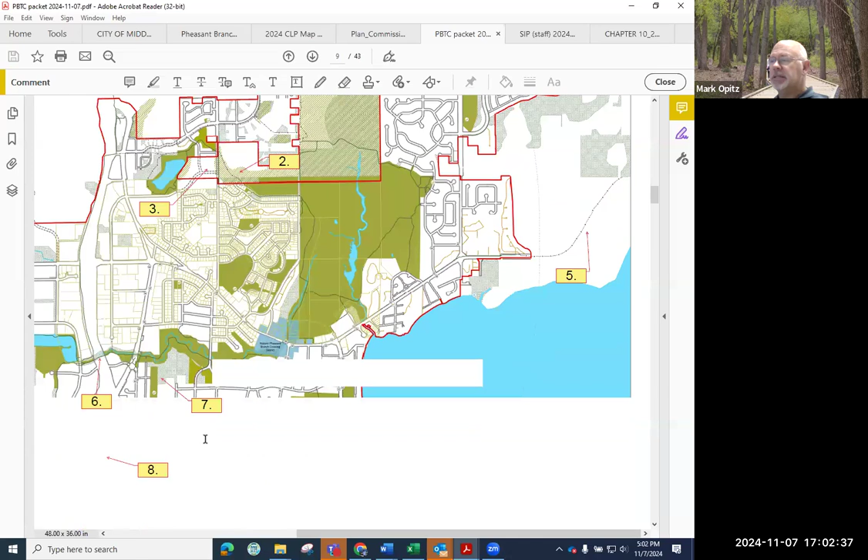So basically, we just wanted to see if you had any feedback. We're showing our trail systems here as part of the official map. So that's showing the continuity between the trail on the north side of Whittlesey Road and the established trail in the Misty Valley subdivision.

I seem to be having mapping display issues. I hope that doesn't go the whole meeting because that would be very unfortunate. There we go.

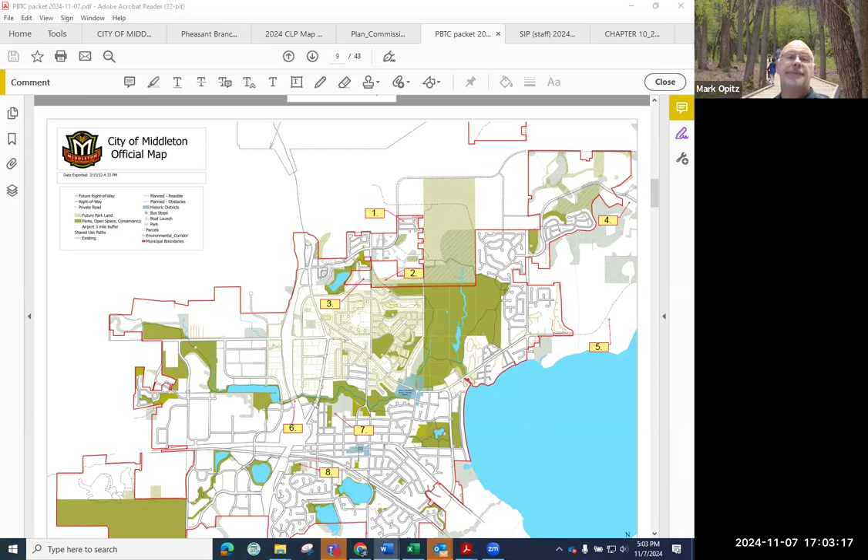Anybody have any questions? I have a question about number 2, where it's pointing. How come there are 2 parcels that actually just got annexed into Middleton last night - one is showing up as solid green, the other one's showing up as a combination of environmental corridor and future parkland? So why is one already future parkland and the other, when they should be the same?

Yeah, I would agree they should be the same. That sounds to me like it's a mapping error. I'll talk to Daphne about that.

Thanks for catching that. Okay, and then also I wonder, so there is going to be a hearing, so we'll have time to make other changes, yes? Yeah, it would be good to make them - if you have changes, it'd be good to go to the public hearing with the final map.

Is there a... well, I'm thinking about the proposed plan now for the Ziegler development on the west side of High Road, having some sort of narrow but existing buffer that they would maintain. Oh, I see, I see. Yeah, we could...

Yeah, I'm having problems zooming in, I guess. We could show that as well. Okay, I think that would be good to do.

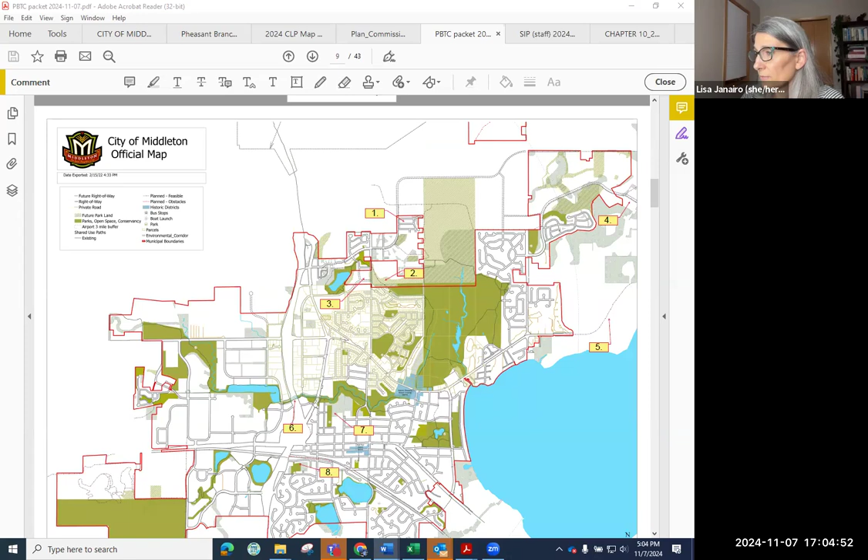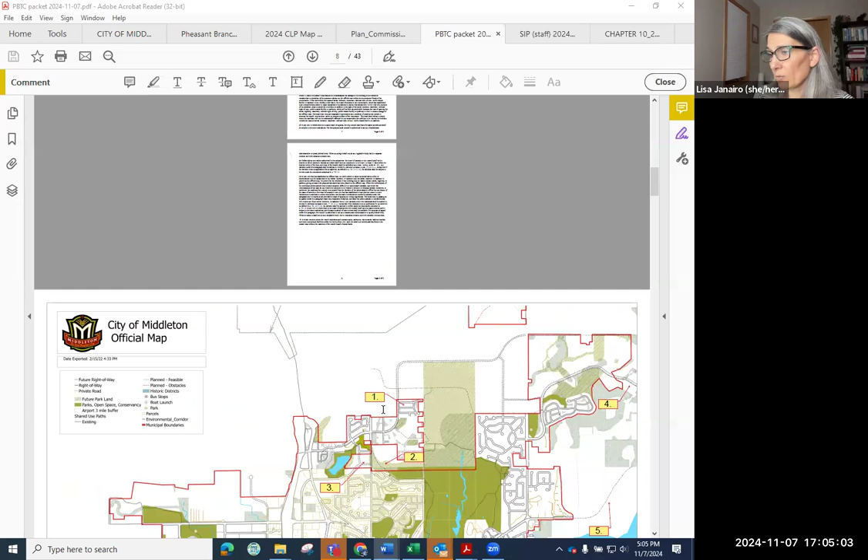And then I couldn't tell, Mark - I know this isn't for the Ped Bike and Transit Committee, but number 7 seems to be showing, I can't tell if that's taking away an environmental corridor designation or adding one, because that's, if you remember, where the bike park is, or the skate park is, and it's hard to call that an environmental corridor.

Yeah, I think what I called it was extended... oh, that's Fireman's Park. Actually, yeah, I'm sorry, is it 8? Oh yeah, that's number 8. Remove parkland dedication from the city-owned parking lot along Terrace Avenue to align with the environmental corridor revision. So it's just making it consistent. Okay, thanks. You're welcome.

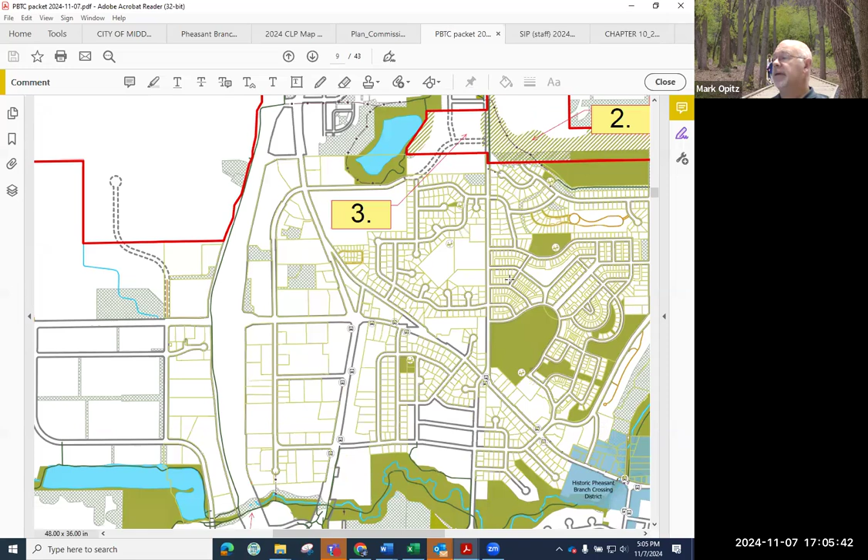So I guess what I would ask the committee, are there any other ped bike facilities that you can think of? I can't think of any. We're showing the Cayuga connector - that's been on our map for a while, and that's budgeted for next year.

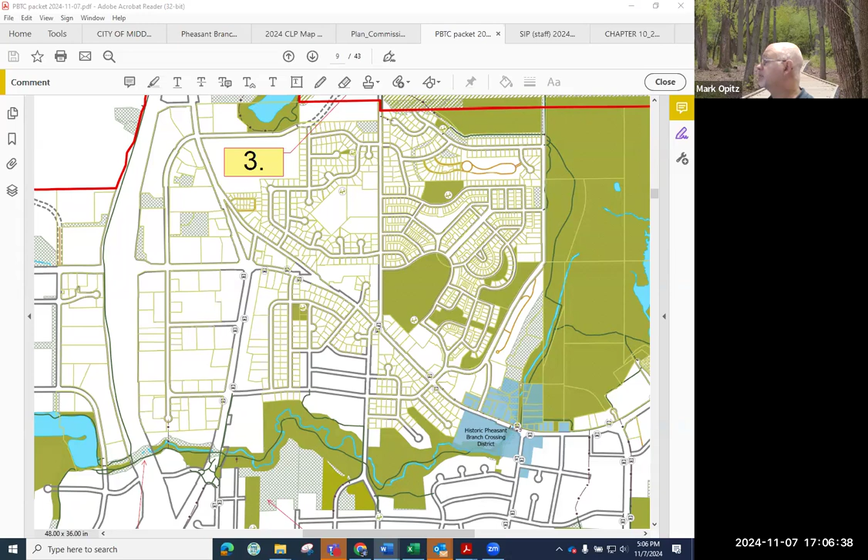Item number 2, preliminary plat and concept layout plan for Ziegler Farm neighborhood.

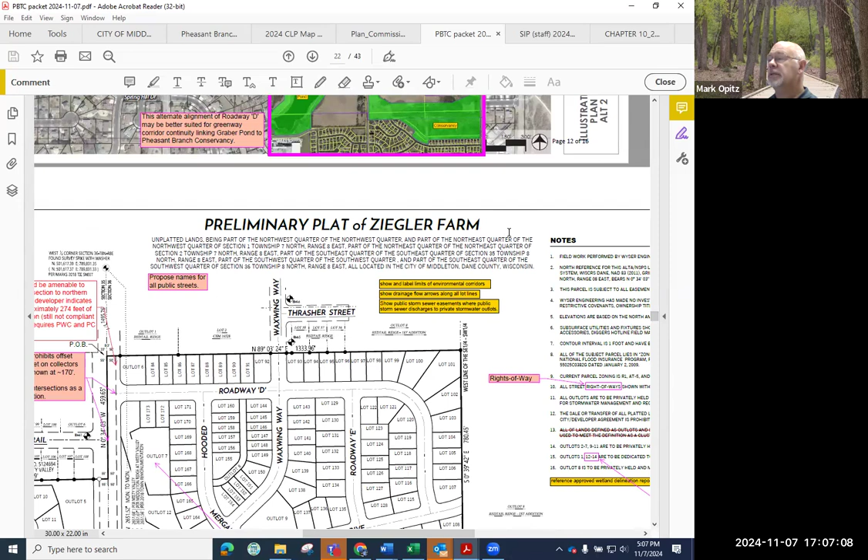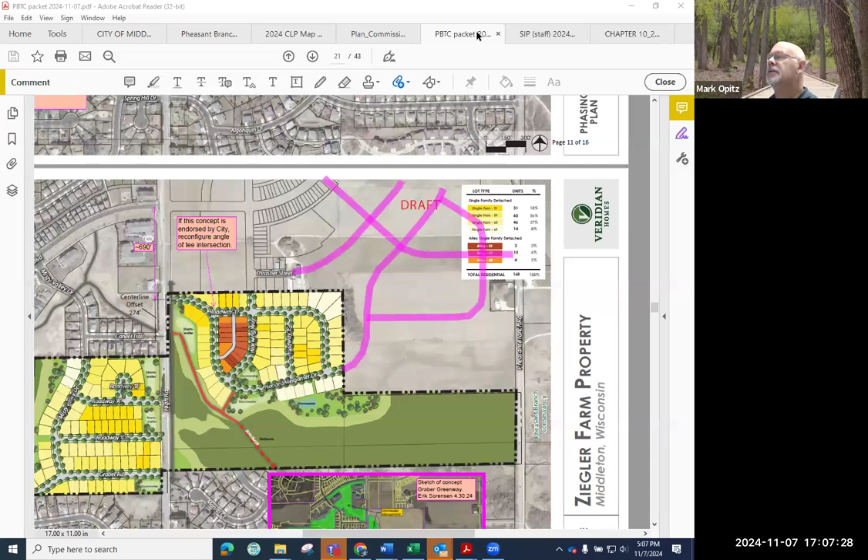I'll display a map I put in your packet late this morning, an updated map. Oh, interesting, it's not in the packet. Let me pull it up on email. Mark, I think it's in the packet. It's on page 22. Yeah, but I'm on page 21, and my packet has 44 pages. Maybe you're using the old one. I am in the same situation as Lisa. Just a second. Oh, it hasn't synced. It's still 43. Let me go to the website and get it. We've had some syncing problems every once in a while, but that's several hours ago. You'd think it would have synced by now. Let's see, agendas. Sorry about the delay.

What I received from the development team is a realignment, a variation of alternative two, concept two, which has gone through the Parks Board, Planning Commission, Public Works Committee, and the Sustainability Committee for feedback. They squared off this road on the northeast side, allowing an additional lot to be developed, replacing a more gradual curve. They're showing a new path connection, shown on an initial version, connecting the two parts of the development east and west of High Road. And here's the greenway buffer that Alder Nairo was talking about earlier, which has been added.

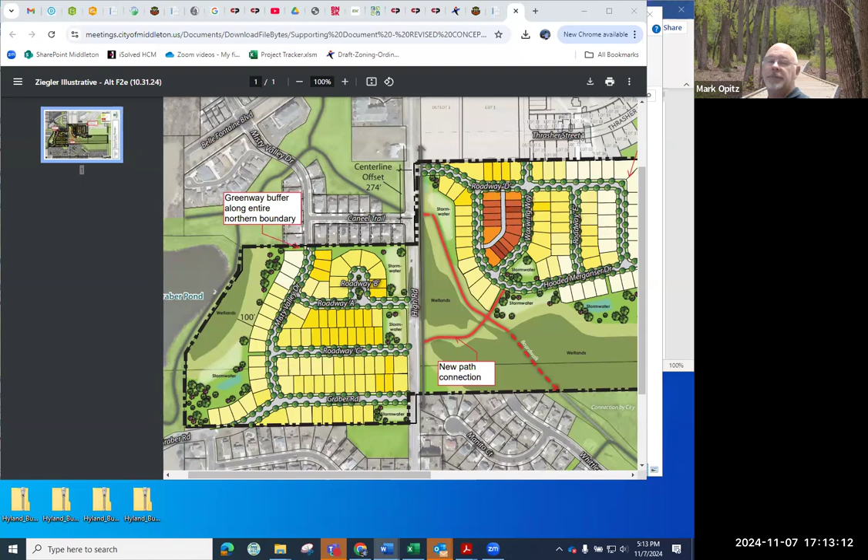The development team is also here if you have any questions: Matt Brink and Brian Munson are both here. I should have introduced them earlier. Kirsten: Awesome, that is great because I do have a question for them. Mark: And Wade Wyser too, their engineer. Kirsten: Got it, awesome, just the people. Wade: I'm glad to be here.

My specific question is about roadway D and Waxwing Way. That is exactly the kind of intersection I'd like to see as a raised intersection. However, I know the grades in that area are pretty steep. Honestly, this applies to the entire east section: how much regrading is going to be done? Because the grades themselves are relatively short, but they're often quite steep. I have tried on more than one occasion and I cannot, on my regular acoustic bike, cycle up High Road heading south. It's too steep for too long for me.

So yes, grades in that area, especially on that intersection, because I know the steep grades could make a raised intersection difficult to impossible.

I'll field that one. Brian Munson with Vandewalle & Associates. Yes, grade on this site in just about every corner except for the wetlands is pretty steep. It's something we can look at, but coming down on Waxwing out of Red Tail Ridge, we're falling in grade to get to roadway D. From there it falls over to High Road and continues to fall down Waxwing Way down to where it meets into Hooded Merganser. So there's a lot of grade change going on across these blocks and in between each lot. Not sure if it would work, but it's something we could take a look at.

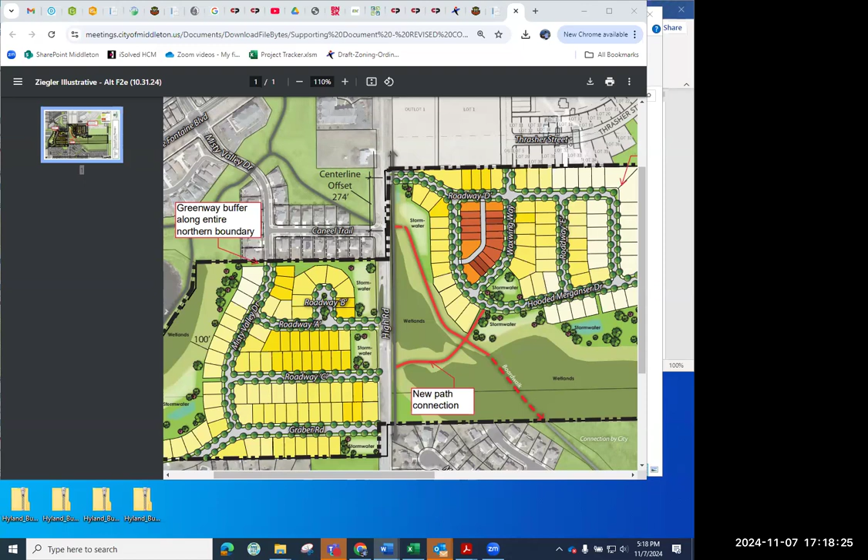Any other feedback? So the other thing I had is I'm with Sean on removing the car outlet to roadway C onto High Road. Removing car intersections there, I think that's a good thing to do.

The only distinction is I would make sure to make that a modal filter so that pedestrians and cyclists can still cross High Road there.

The implications of that would be to either create a cul-de-sac or to have the road bend either south or north to the other streets. When you have a road bend like that, that affects things, then you bring it in at an intersection that is really close to another intersection. I would lean towards the cul-de-sac because in this case it's a cul-de-sac that only affects car traffic and not pedestrian and bike traffic.

I did actually have a third piece related to that. It'd be nice to see pedestrian paths connecting roadway A to roadway C, and roadway C to Graber, at roughly the mid block of each of those. Those are both quite long blocks for a pedestrian, and it's one of those things where you walk a long way and you're still just at somebody else's house, not necessarily at any kind of destination. These blocks are very much automobile scale.

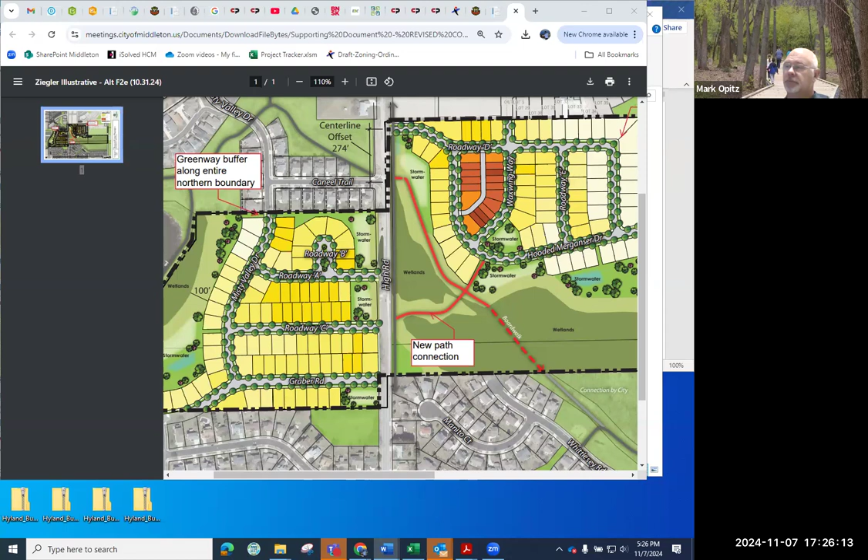Our public works staff is amenable to the spacing now—that was their initial concern, Tad. Okay, but that's not something they've drawn a line in the sand on. If we look at Orchid Heights, and only having—is it Indigo and Heron—is that right, only those 2 exits to Q for that large neighborhood? Is that correct, only Indigo and Heron?

Well, and now there's a connection down here at Red Tail Pass—there's a third. No, your original statement—I understand why you said it—it used to only have 2 access points, now there's a third down here. That would be a good comparison: having that amount of homes with only a couple exits to Q.

So how many lots are on C? It's about 13 or 12. 1, 2, 3, 4, 5.

11. Maybe 12 in this one. 3, 4, 5. Right, so 12.

Okay, so yeah. I don't want to draw a hard line in the sand either, but this is one of those things where, yes, I understand the traffic distribution. It seems to me it's still a very small amount of traffic to be redistributed to other locals as a way of avoiding too many sequences of these semi-uncontrolled intersections, specifically along our collectors. And this is getting into more of a land use issue also.

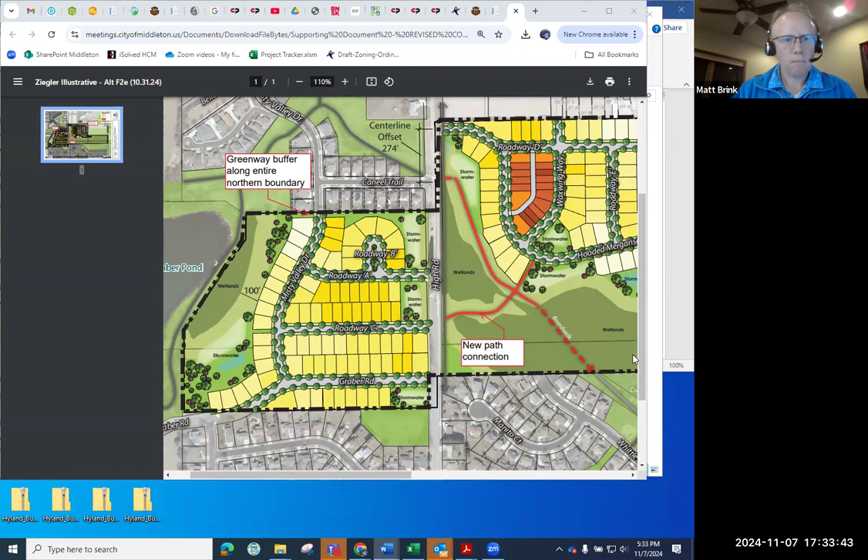I would add, Matt, that what Tad was saying is that even if there were a cul-de-sac, he was still envisioning a path connection through here. Yes, it would only be a cul-de-sac for cars. It wouldn't end up being blocked by lots or anything. It would still connect to the path system.

So I think Kirsten had her hand up. My only request is that any paths made through here be permeable, since we are building very close to wetlands and the grades. Permeable paths shed ice and snow and dry faster, but especially because of the wetlands, I would suggest we go that route. Penny Klein was a huge pusher of that path, and although they are more expensive, they last almost twice as long.

I know that Kylie has an opinion on that, and it might be good to share that if you're comfortable, Kylie. For the location, or what specific? The trail surface being porous or permeable asphalt.

Yeah, if it was a permeable surface, we wouldn't be looking at porous pavement for asphalt, we would be looking at crushed aggregate or limestone as the other alternative. Our asphalt standard would match some of our newer paths, such as the creek corridor. That's the direction we'd like to go moving forward with asphalt paths through sections, but we can explore what surface, whether asphalt or that screening trail through there.

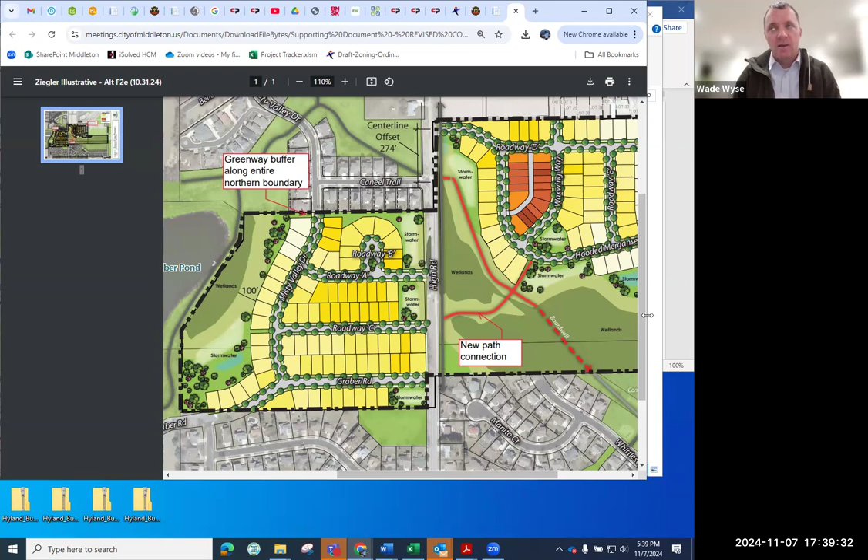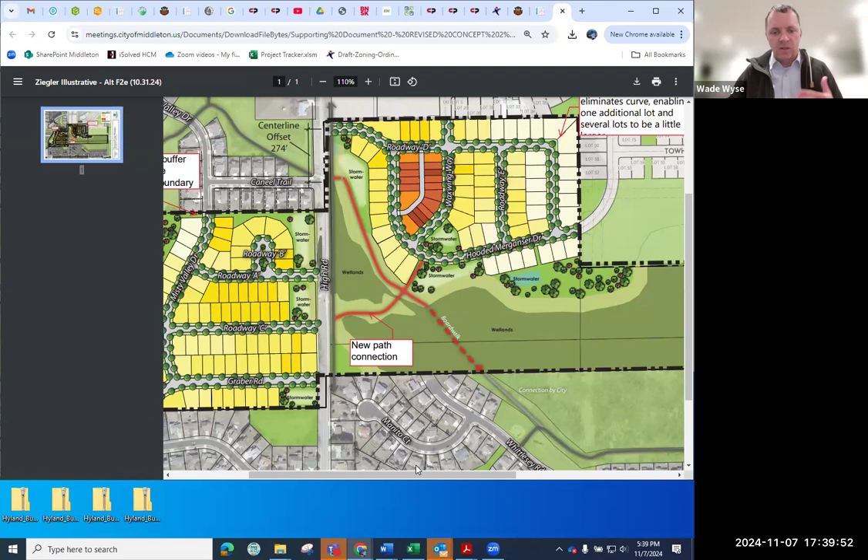One thing to consider is the layout of our stormwater management facilities on this site—they are pushed uphill. We did an exhaustive search of the soils, and any path close to wetland with porous asphalt will have a tough time draining. We pushed infiltration facilities uphill to get better soils for infiltration. Lower on the site we pick up a lot of clay, so infiltration is difficult there, and if that's underlying permeable asphalt, it can create a challenge down the road for long-term viability.

One other thing about the comment on a trail from Misty Valley Drive down to roughly Graber Pond—that's something we can take a look at. Again, grade is our challenge. Graber Pond is down at about 905, and Misty Valley Drive is up at 935. So we've got to span 30 feet of grade going west down to Graber Pond, which could make for a very steep path, but we could look to see if there's any alignment that works.

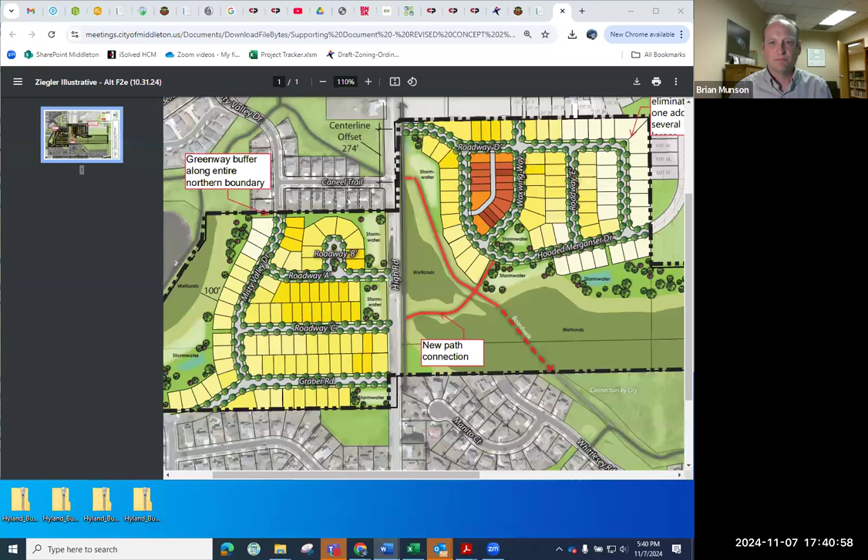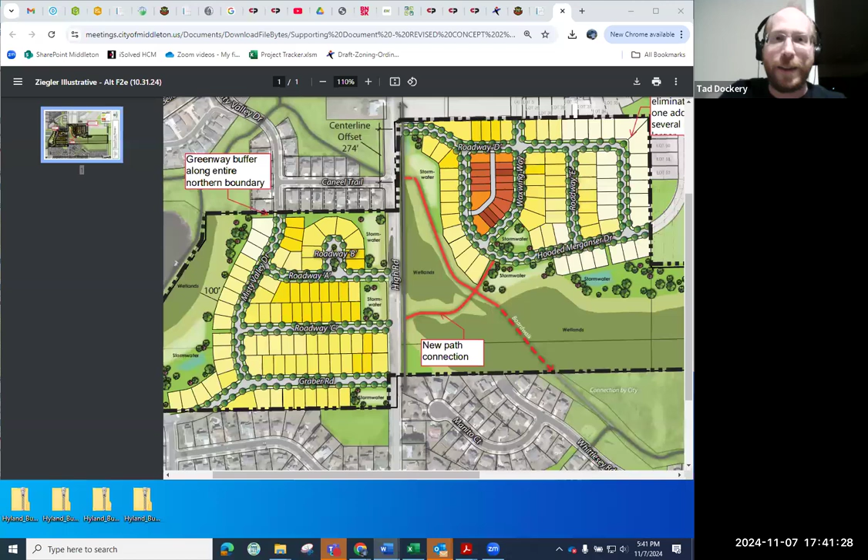I would like it noted that there's consensus on the new path connection and the alignment of the boardwalk path. Yes, I like the X path—specifically the red X, basically—is what you're getting at. Okay.

I wasn't sure what the takeaway was for the path to the west here from Roadway C. Oh, that's not shown. I wasn't sure if that was fully understood—what the discussion was at Parks. I guess I didn't stay for that part of it. Kylie, what did you say there?

The path over there—we just want to make sure there's connection into the trail system. I know there's a grade issue that's been brought up several times through this meeting and our previous meeting, but we're trying to have trail connectivity. We'd like to look at something that would border some of those lots to create a fire break if we manage those as Conservancy lands. Trails bordering some of those lots would really help create a natural fire break for our restoration efforts in that area and make it a little easier.

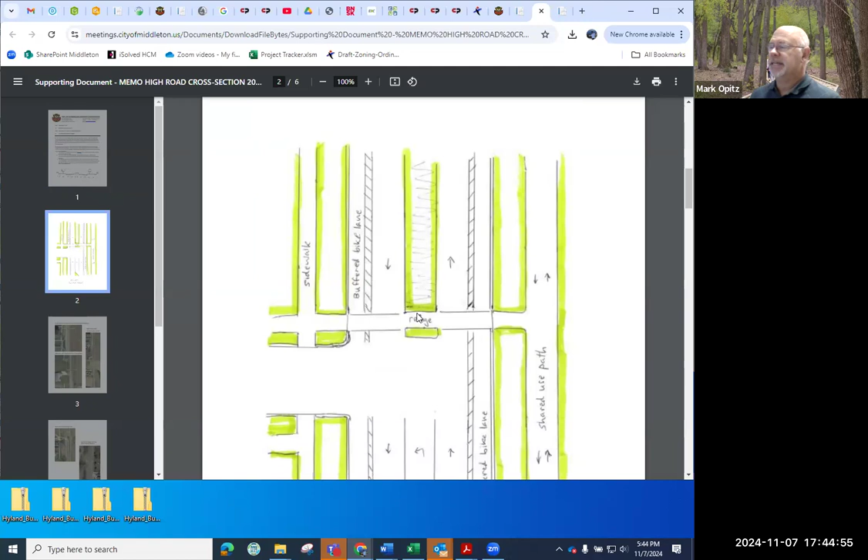I'm suggesting that at the 3-way intersections there be extra width to accommodate pedestrian refuge. We don't necessarily need left turn lanes, but it would give us the flexibility to do that if ever deemed necessary. It would certainly be desirable at the Bellefontaine and High Road intersection. So that's what I have—here's the Bellefontaine and High Road intersection. I'll turn it back over to you, Tad.

I think it's a pretty great design. What does everybody else think, Kirsten?

I really like it. Are we thinking about an RRFB at Spring Hill, especially because of Northside Elementary being there? At Spring Hill, up the hill, you mean? Because Spring Hill is a really major crossing from Middleton Hills over.

I love this, I love the plan. I would just recommend an RRFB at Spring Hill as well, so that when people come up either side of the road, or if they're on the path, they would have a way to cross up here, is what you're saying.

Correct. Just especially because of Northside Elementary. That's in my district, so I certainly would support having that.

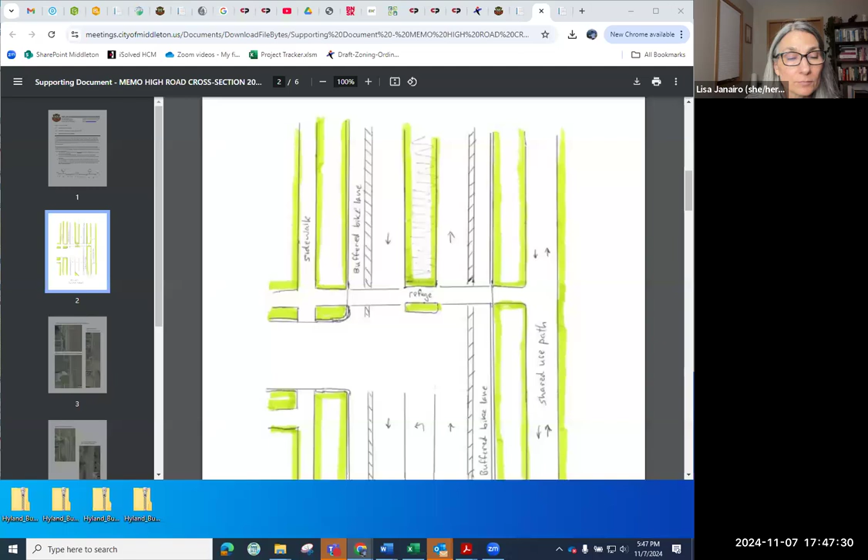Is there any way to slow traffic near Spring Hill, just because it is on the downslope heading north and people will be picking up a great deal of speed? I think if we could figure out a way to do that, that would be amazing and my constituents would greatly appreciate it. But I don't know what you could do other than put in a stop sign or have a police car parked to watch for speeders.

A raised intersection at High Road and Graber would slow people down in a hurry. Or send them flying. Yeah.

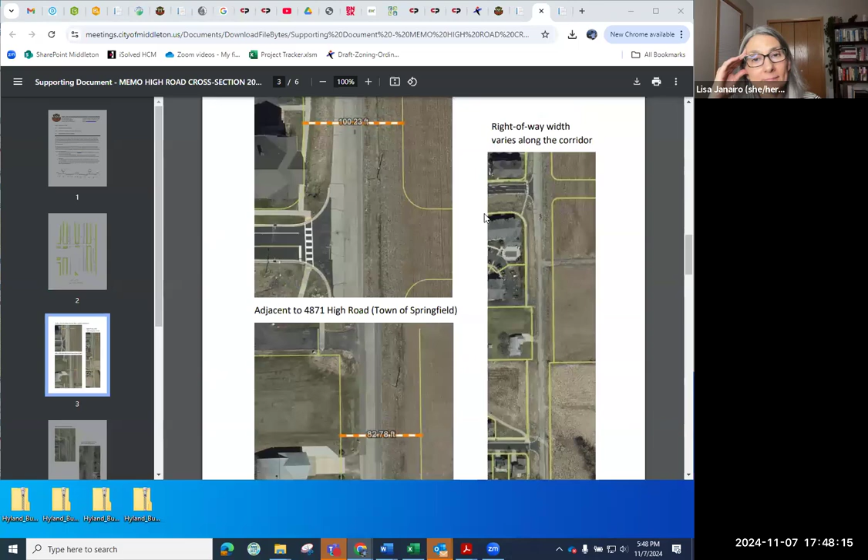I was just wondering about the Spring Hill intersection, trying to picture it. You're going up a pretty big hill there, is that right? Yes, Spring Hill is the hill. That's the hill that Tad is unable to ride his bike up.

So I'm just wondering what would happen there, both in terms of where cars would be stopping on the hill, and I'm just imagining it in terms of bad weather, and whether it levels off there or it's still on the way up. I'm thinking it levels off a little bit.

The hill starts down here and continues all the way up to about the water towers, the top. Okay, and it doesn't level off a little bit at Spring Hill, or is it straight up? There's a little bit of it. I wouldn't call it level.

At the intersection, it does get steeper. So in other words, when you go down from the water tower, it's not as steep, but then after Spring Hill it drops down. Okay, well, that view helps to see. Yeah, so it's definitely the steepest part right here.

I used to live at this intersection, so I know it very well. Part of what I was wondering about is the visibility coming then from heading south on this one, over the little hill here, whether if there's people stopping, whether they'd be visible or not.

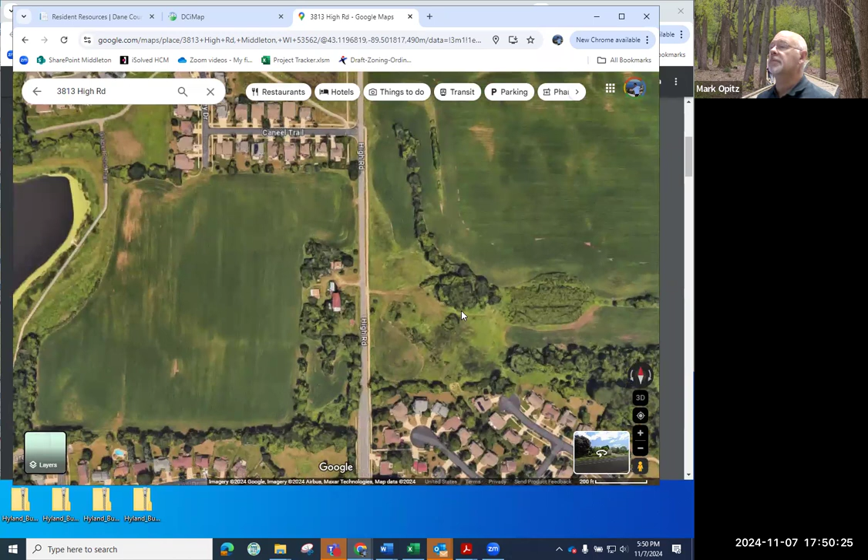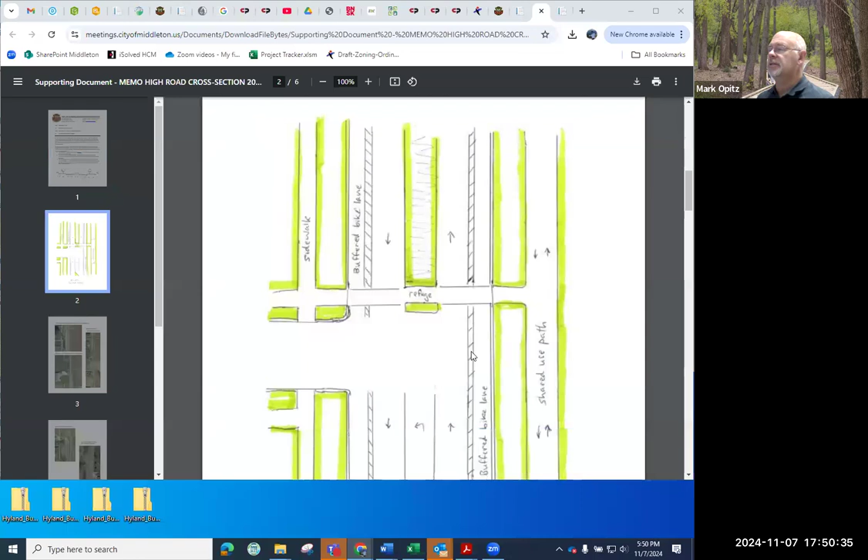So going back to, generally I'm hearing that you support this idea and concept. Yeah, okay, well my time paid off. And I do think that, partly because of those hills, we will likely want those left turn lanes, at least at the intersections.

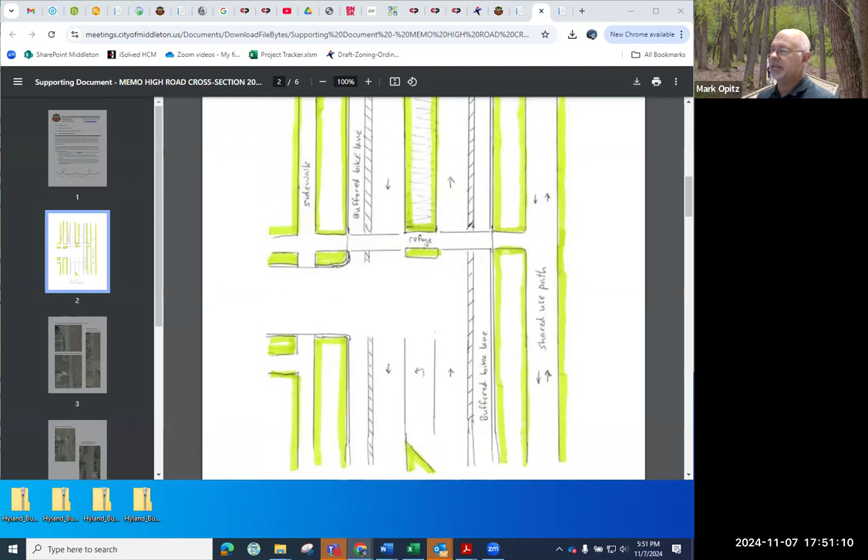The reason I suggested it was just to show that I wanted the design to have the ability to do it. We don't have left turn lanes at most locations, we don't have them here either, and there's not necessarily a need for them. Arguably there's more cars turning down here because there's more development.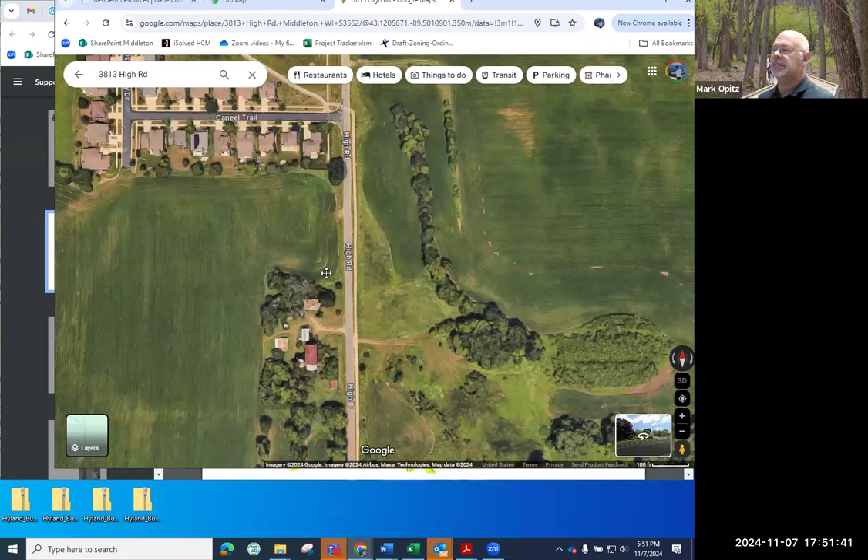I thought it would be especially important in the future to plan for a left turn lane at the Bellefontaine intersection. Whether we need them here is... there's Caneel and then there's 3 other streets coming in, one up here. What I was simply trying to show was that if there was, for some reason, a need for it, it could be done. There's room. More importantly, that we have a pedestrian refuge.

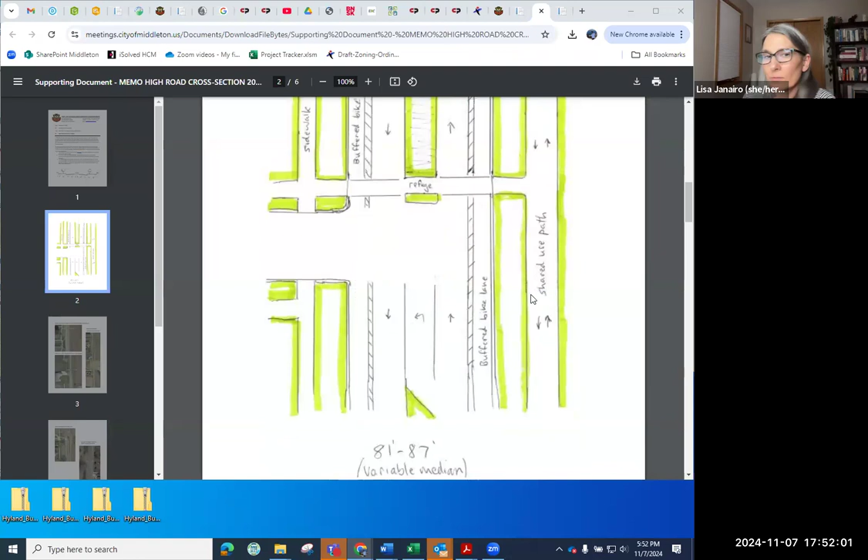Okay, that sounds good. May I ask a couple questions? Mark, what's the width of this cross section? It varies from 81 to 87 feet with a variable median width. So if you add all these numbers up, that's the 81 to 87 feet.

So 10-foot travel lanes. I thought I was channeling my Pedbike Transit Committee members to say let's not do 11-foot lanes, let's do 10-foot. Tad's giving me 2 thumbs up.

I know bike lanes are needed by people who prefer biking on the street, and having them with some buffer is good. I don't think we're at a point in Middleton where we're comfortable putting in protected bike lanes, even though I know that's more desirable. We at least have a path on one side if somebody wants protected lanes. Having a protected lane with a barricade or curb is just not very practical from a maintenance standpoint. So importantly, we are having the 10-foot path on the east side.

That's the thinking. Okay, and there's sufficient width all the way and continuity all the way up, even past the house that's still in Springfield? Well, that's a good point. That's the only one, and you can see where the sidewalk is here. That's the only one with the constraint.

What I was thinking, and I didn't measure this, is we're not going to be able to put the sidewalk across their property. So we may end up having a gap there, unless this part here, where these are right-of-way boundaries, and this part would be dedicated by this plat. So this will be a straight north-south line, and the edge of the road would be right along the property line.

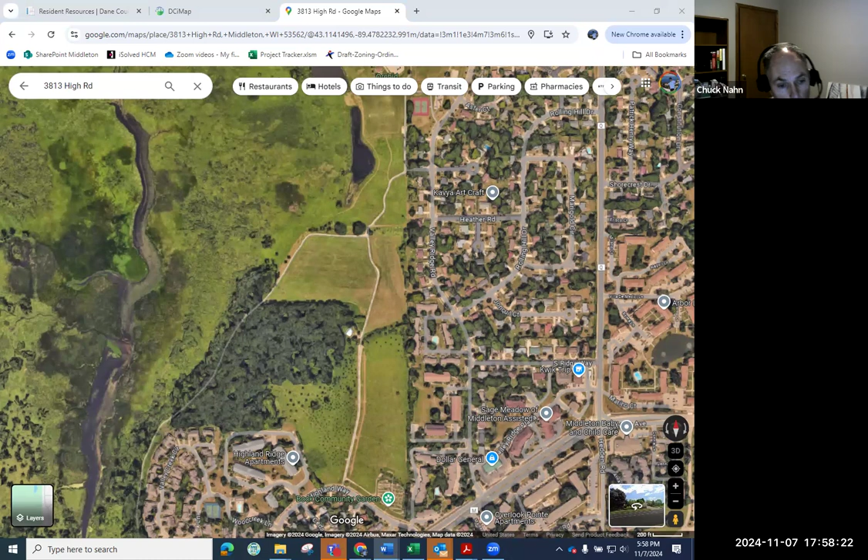I have a personal story: I was biking home one night trying to go down that gravel hill and hit the ravine at the bottom. A rain event had washed out the trail, and I literally went head over my bike, landed on my face on the gravel, scraped my face, and broke a rib on that section of the trail. I think it is very unsafe.

It washes out after almost every rain event, leaving divots that are impossible to cross, particularly at the bottom where water accumulates. It washes out the fine gravel and leaves loose gravel that you literally cannot bike through. You have to walk your bike through about 10 to 20 feet because you fishtail trying to bike through there.

My next door neighbor, Charlie Crow, is handicapped and in a wheelchair. He shared with me that he's been trying to get up into that section of the trail and has gotten stuck, and his sisters couldn't push him out. That trail is not ADA accessible, and I think if we put in pavement, it would be accessible.

So I generated this petition and want your input on the possibility of paving this trail. This is my own personal opinion, but I've worked with Penny Klein in the past doing porous asphalt, and we've had real good success with it. I think this trail would be a good candidate for porous asphalt because of the drainage problems it has.

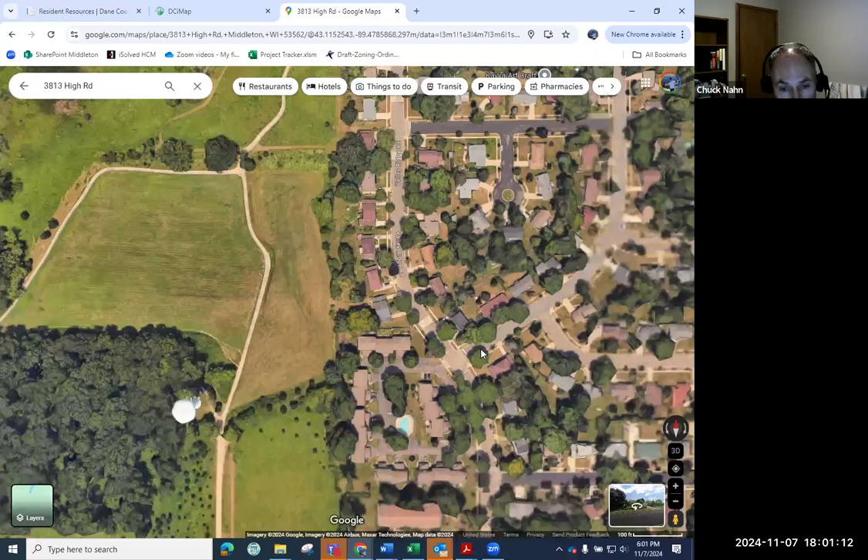That's a great trail, but right now to get access to it we have to go down busy Valley Ridge Road, which is a collector street, and there's a very dangerous intersection at Valley Ridge Road and Century Avenue. Coming down Valley Ridge Road trying to turn right onto Century, there's a blind curve where you can't see people coming on the trail from the west.

Conversely, when coming back up the hill to get to Valley Ridge from Century, you have to cross that intersection to get on the road, and all the cars going down that hill are looking the opposite way to see traffic on Century. They're not looking in the direction a bike would be coming up that trail to turn there.

So these are some of the reasons I think a paved trail should be considered.

This was presented to the council a month ago, and the city administrator asked that the Ped Bike Transit Committee review it as the first committee to review it.

We have a couple of hands up, Ted.

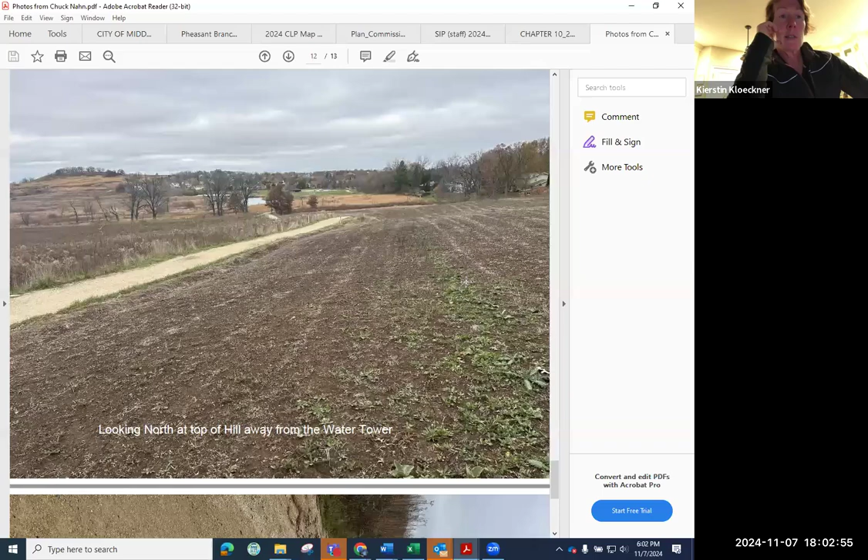And I do believe that the path going down from the water tower—I'm a seasoned cyclist, mountain biker, gravel rider—I take it extremely easy going down. It is like loose kitty litter oftentimes at the bottom, that's the best way I can describe it. And I've had close calls, even as a seasoned gravel cyclist, going down that hill. It does get washed out with almost every rain event.

I was one of the first people to sign this petition. The one thing that would have to happen is we'd have to do a switchback because of the gradient up the hill, so we'd have to get approval to be cutting more into the prairie. But I think a switchback would be lovely. This is more of a recreational path versus a commuter path, and winding through the prairie would be beautiful, especially if using a permeable surface so that drainage is proper through into the wetlands.

The reason you're talking about a switchback, Kierstin, is because of ADA design standards?

Absolutely, yep. And also erosion, because even if we just paved the trail that's already existing, we're going to get extreme erosion on either side of the trail. I actually do trail building at Blackhawk. We would have to either put drainage underneath the path to divert the water if we kept it at the gradient it is now, or we have to lower the gradient to help prevent erosion.

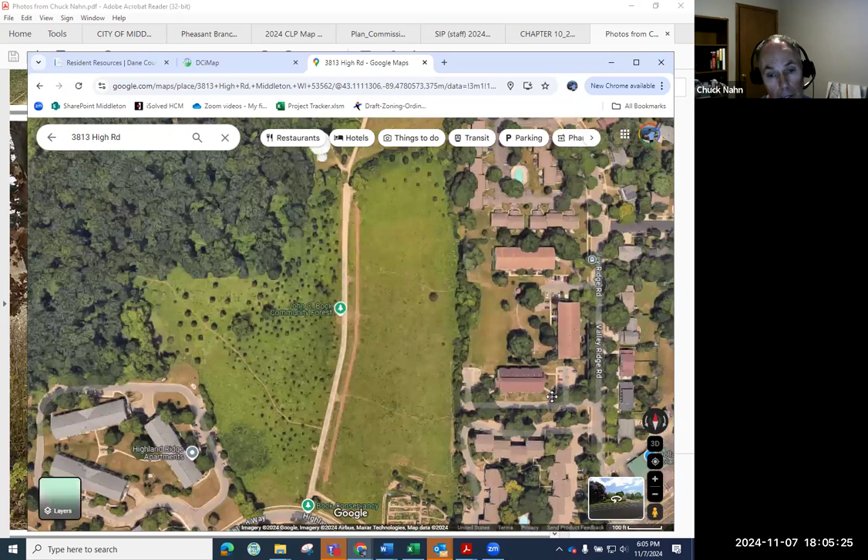One thing I would like to address, first off from Charlie Crow—he wanted to be here tonight but couldn't be. He said, I would like to focus on the portion of the trail that goes through the loop on the north side of Century Avenue to make it safer and easier to traverse for everyone. And I would like to point out it is a multi-use trail that is far away really from the environmentally sensitive parts of the Conservancy. I think providing access for multiple users is the purpose of this trail, and right now it's not being provided.

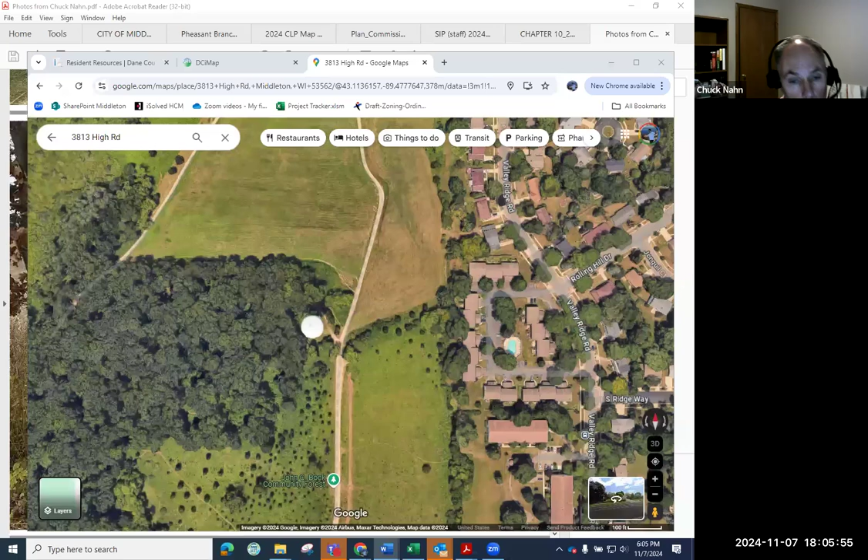The slope is 6.8%, and right now it's 6.8%. The allowable ADA slope is 5%. So this person is correct, we would probably have to put some switchbacks in there to get it to be a little bit less of a slope. Also, the gravel is not considered ADA acceptable, and pavement would obviously provide that ADA accessibility.

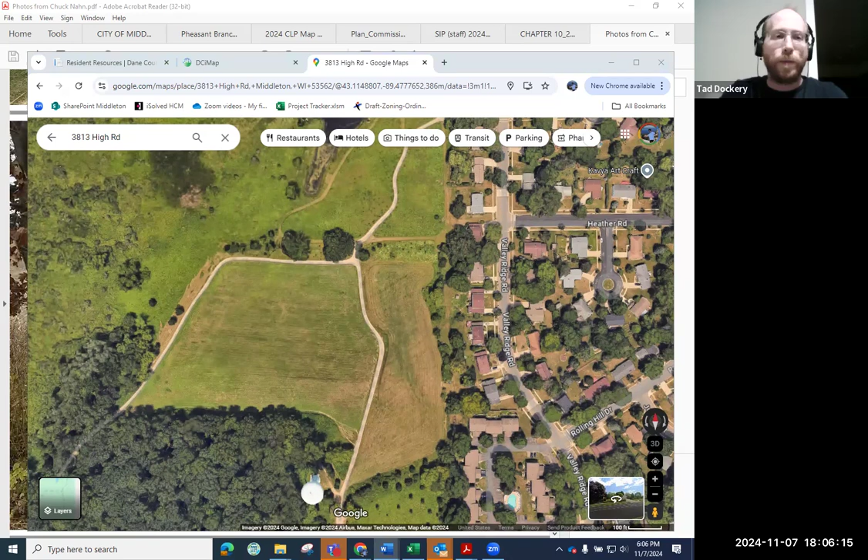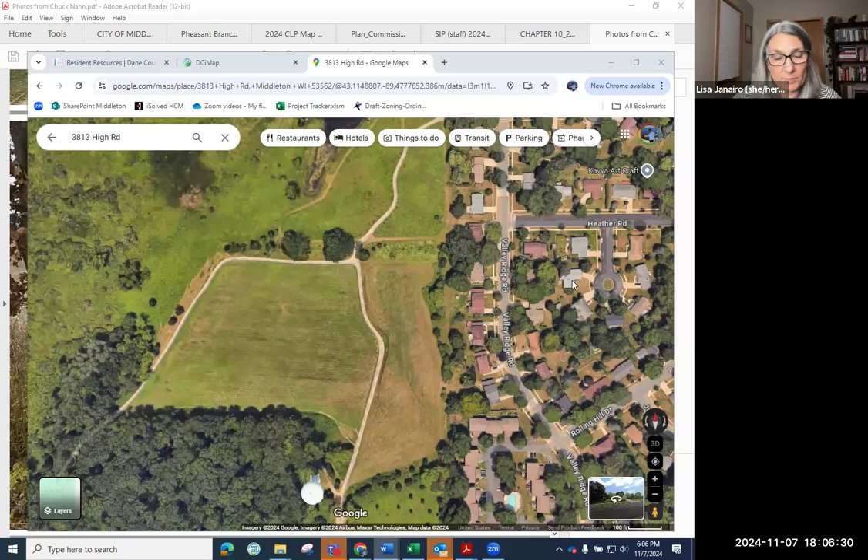Thanks. I'm sympathetic to this request. I live on the other side of the Conservancy, and just from a bicyclist's perspective, there are a lot of places where it's not quite as bad as this hill, the grade, but it's dangerous to ride after any rain. There are deep divots, there are areas where it's like kitty litter, sometimes coming down a hill or trying to get up a hill.

So I guess my thought about this is we shouldn't be considering just one spot. We should be looking at the Conservancy as a whole to make sure that it's ADA accessible. I don't believe the wheelchairs are available anymore, not at Orchid Heights Park. They need to be reserved in advance and picked up by the user, which is as good as not having any available, in my opinion.

So even if it's not possible for the city to do all of the trail work that might need to be done in one year, I think this should be looked at more broadly for all parts of the Conservancy path, where right now the gravel is making it either inaccessible for certain users or dangerous for others. And I say that knowing we also need to be mindful of the impact this could have on the function of the Conservancy—are we creating more runoff and more pollution, or cutting off paths for wildlife to cross? I think this needs to be looked at big picture before we take any specific action on any segment of the Conservancy.

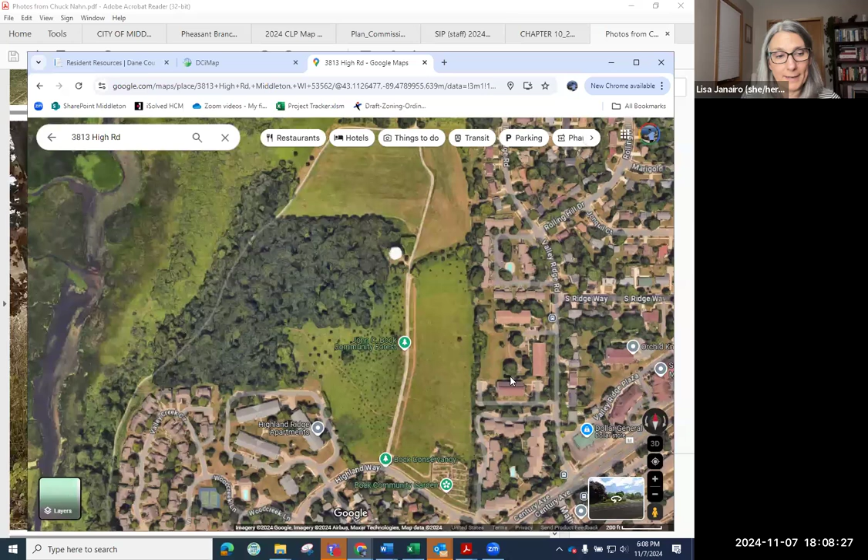Yeah, I agree with Alder Janairo. I think this should be looked at holistically. I do not disagree with the comments folks have raised, but in addition to the holistic look at this for the entire Pheasant Branch area, I also think we should look back at the reasoning and rationale for why it is the way it is now, and make sure those particular concerns aren't still outstanding.

I wasn't here in 2009 when that plan was put together, but in the plan it specifically says there have been numerous requests from trail users who desire more passive recreational opportunities. So I don't not support this, but there was some reasoning and rationale for this in the first place. If we move forward, I agree with Alder Janairo that we should look at the entire Pheasant Branch Conservancy, but also acknowledge the original intent and make sure those concerns are incorporated into whatever we do in the future.

I'll just say, from the perspective of the longtime staff person, this has been a debate for 25-plus years, the trail system in the Conservancy. When it was established, the west side, then the north side, and finally the southeast loop as it's called, there was a definite interest in the community to maintain them as gravel. There was a group of people that supported paving, but that was a debate that came up at various times over the years.

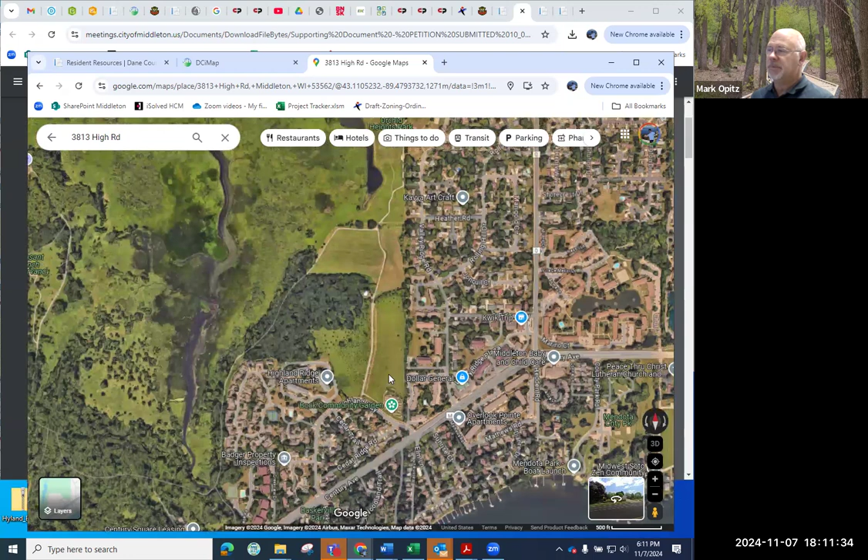The North Mendota Trail construction was intended to provide a paved connection to the northeast side, instead of partially paving the southeast trail. This connection here is more upland oriented, away from the wetlands. I can see the merit in continuity for having this connection here. I do think there would be substantial community debate and pushback to paving other sections, or at least certainly the entire loop. So that's the history I can offer.

I guess I would just like to add, we would certainly support the holistic approach there. I think the problem I run up against is that a good portion of the trail up by the springs is county owned. It's not city land. So right here...

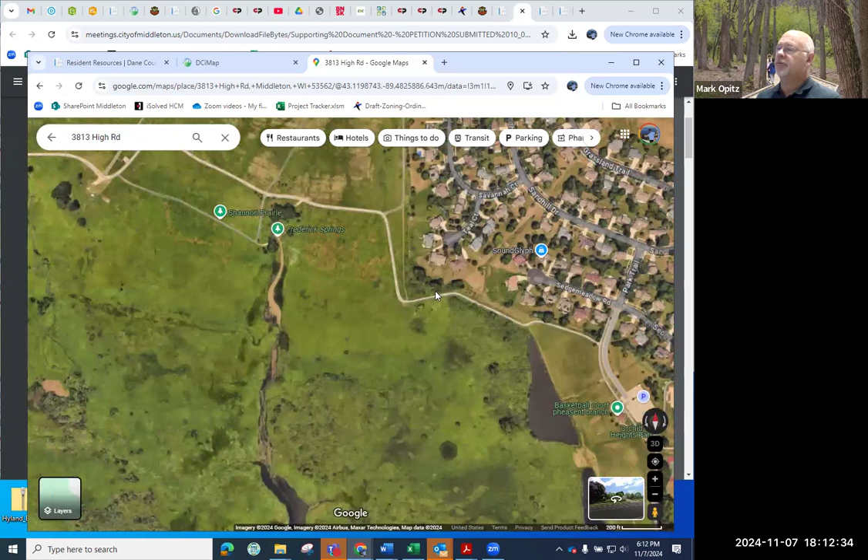From this spot right here at the corner of North Lake, from here to the north and west is in the county's jurisdiction, coming back down to almost Whittlesey Road, and then it returns to the city's jurisdiction. This would give us at least something that I think is in the city's wheelhouse to do, and it's a critical connection for us to get from the end of the Dahlia Court pavement, just up that hill, and get to Highland Way.

Once we get to Highland Way, we're on that trail, and eventually in 2 years, I know there's going to be hopefully an underpass underneath Century Avenue when they redo the Century Avenue Bridge. This could be a safe route to school for some of our kids that need to go to Kromrey. There's a lot of things south of Century that right now, us in North Lake, Orchid Heights, and also Highlands of Bishops Bay have no way to access non-vehicularly other than the gravel trail we're talking about, or going through the part below Wood Creek condos.

But that's a very small area of the trail, and I think this would have the benefit of actually pushing some of the bikers away from going that way, and they would go up this route and not go on that part of the gravel trail below the Wood Creek condos, which is very narrow and unsafe because of that.

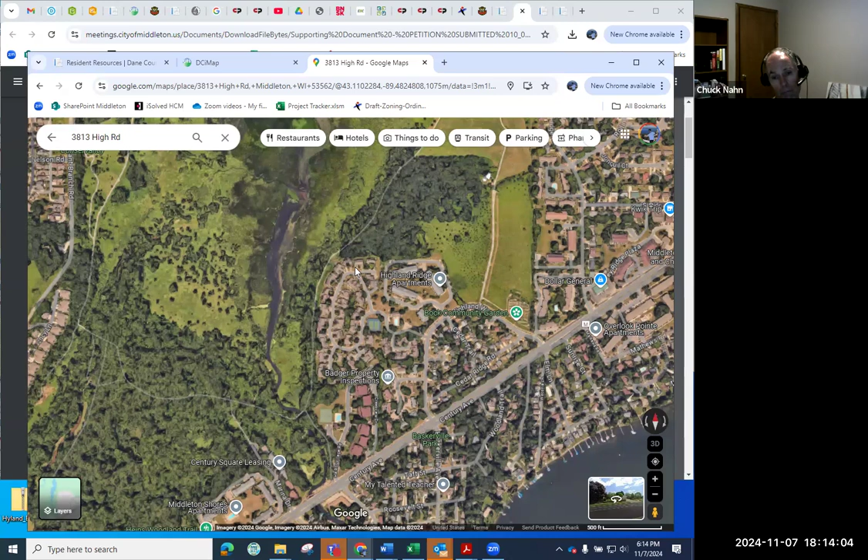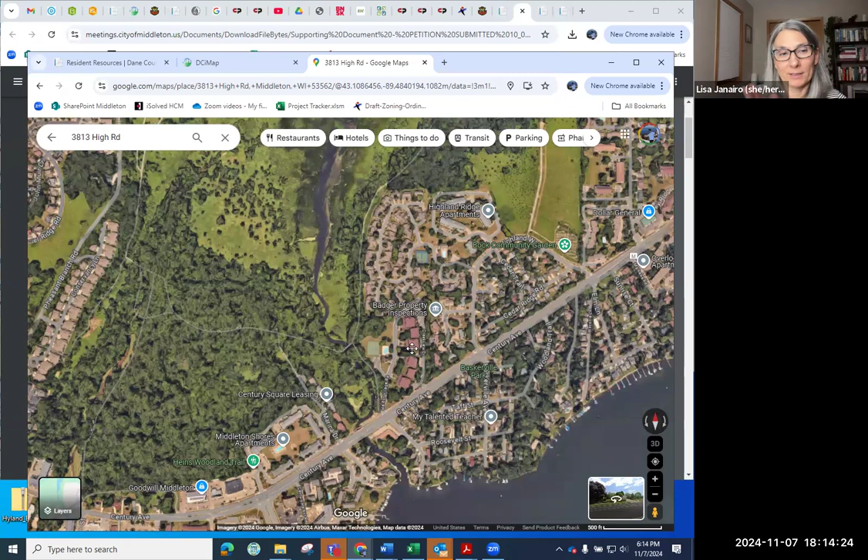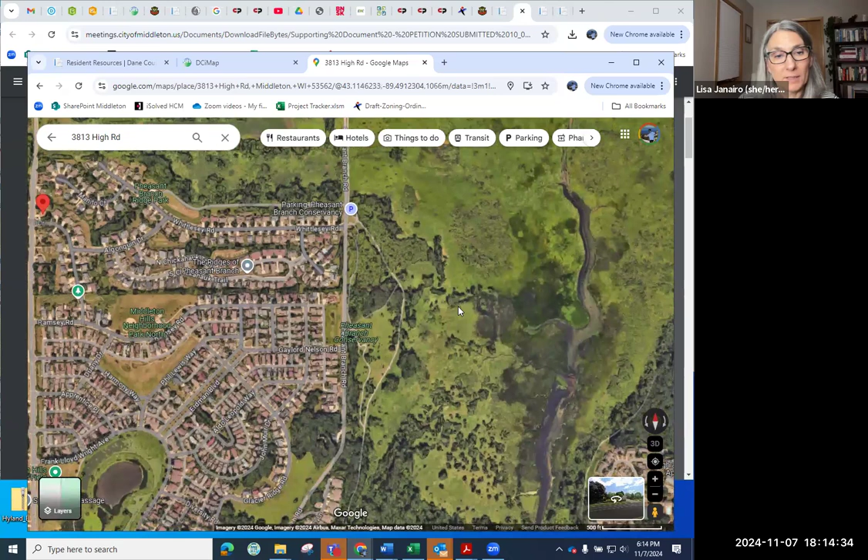I would just add that the description of how difficult it is to get from this neighborhood down to Century and access the existing trails there, without using a car, that's the same thing we have on the west side. To get from Whittlesey Road and Middleton Hills in general, there's no sidewalk on Pheasant Branch. I would never ride my bike on Pheasant Branch Road, so taking the path is just about the only option to get to Century, and that's just not something a lot of people can do.

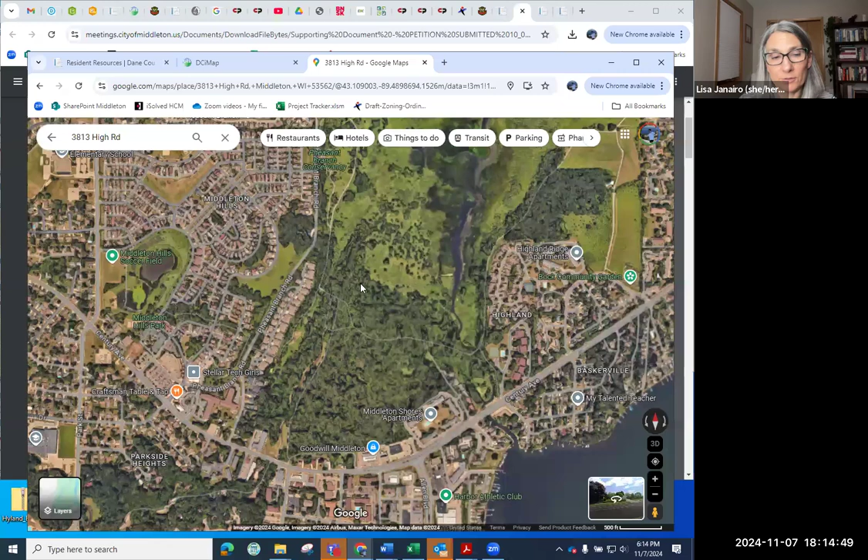Certainly not somebody using a wheelchair. I think we need to bring this up as a vulnerable user situation and really talk about safe routes to school when we present this—safe routes to school, safe routes to work for both sides.

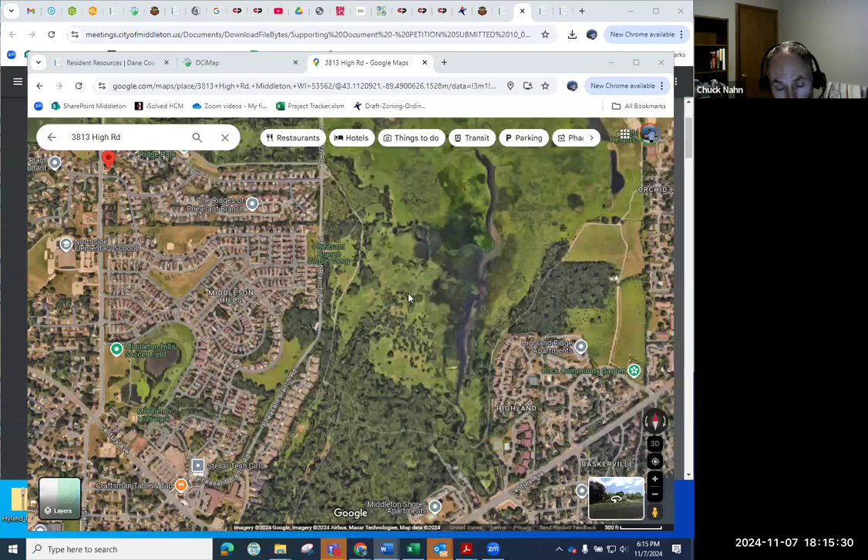Yeah, from our perspective, all the city services that we would love to use—the library, the city hall—it's all south of Century, and we're north of Century. The northeast section in particular, I think, is a little bit isolated. I know I've seen a lot of the newer developments have trails integrated into them, but unfortunately North Lake did not have that when this was developed.

I think we'd also want to focus on the designation of this trail. This trail is designated as multi-use, and in the city plan it says bicyclists may have a harder time during wet times and during the winter. But I've been on this trail with my bike too, and I agree, Chuck, I don't think it's meeting its designated use in certain areas. There are places you can't bike through, even in dry conditions, so that's another point as well.

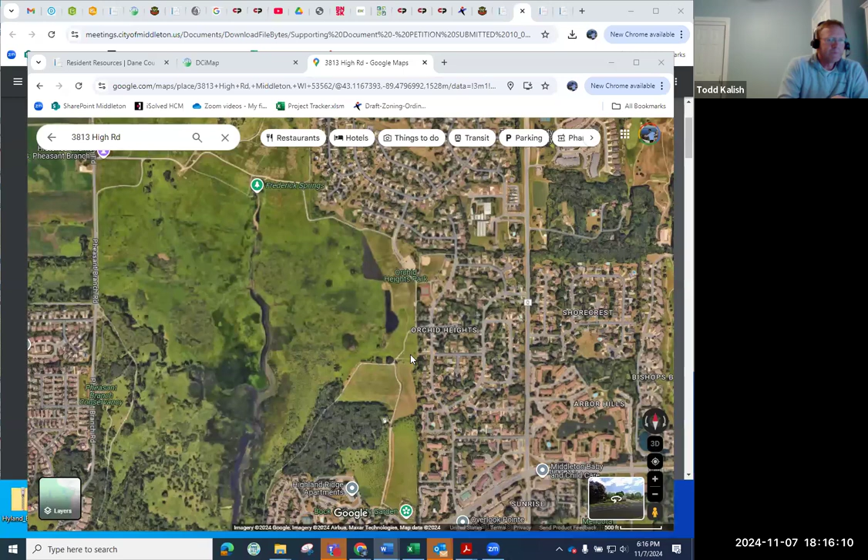One other idea I'd mention, from the perspective of being here a number of years, is user conflicts. We haven't really talked about that, but it's one of the concerns raised about paving, and associated increased speeds for bicyclists. Also, some runners have said they don't prefer the asphalt—they prefer non-asphalt surfaces. I'm just bringing up the full range of perspectives we've heard over the years. Obviously one way to deal with that is a separate facility, like a separate paved or gravel route, but that gets into extra costs and maintenance expenses.

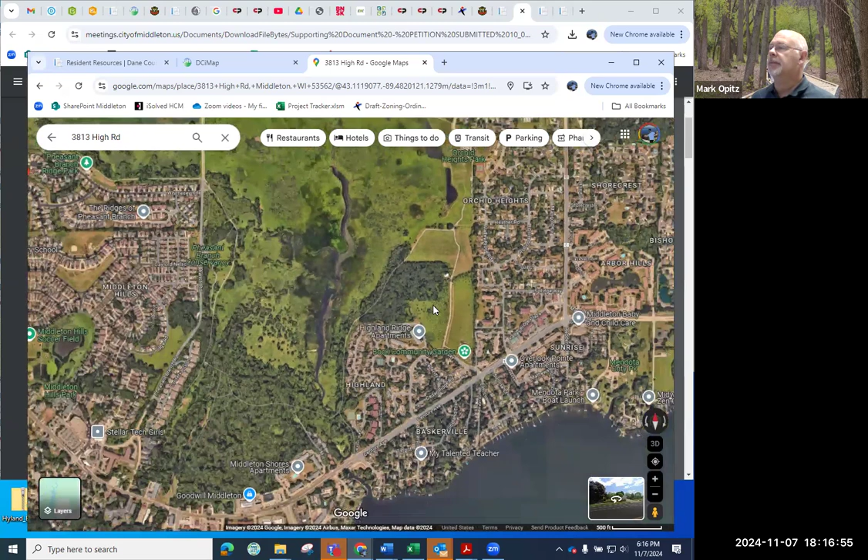I think those are good points, Mark, and I'm also mindful that we have the survey for the active transportation plan, and also the survey for the Conservancy Lands Plan, and I would hope we'd be able to get some information from those regarding what residents were saying about both these things.

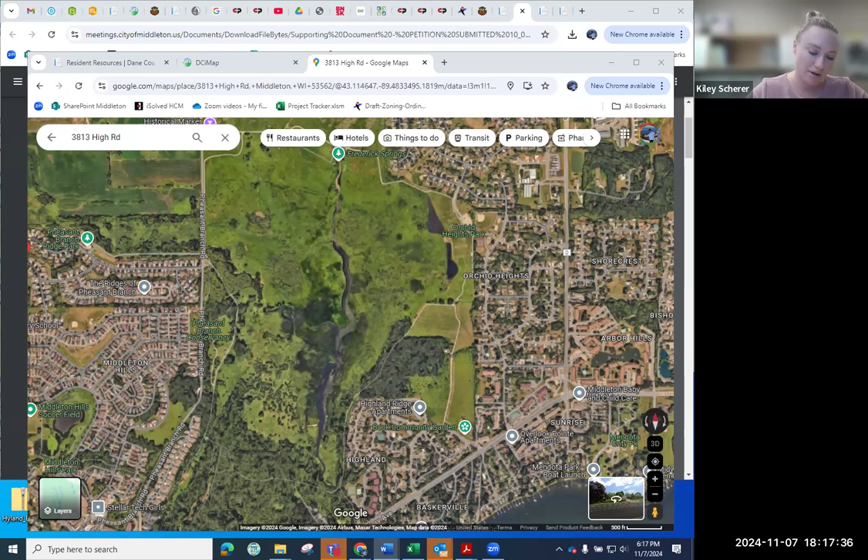Hi. Yeah, I don't want to go through all of these things on this platform here, but just to bring up that we are having our conservancy master planning at this time, and trails have been a part of the surveying throughout our entire system. So we will be getting some information and recommendations and data back from that. And then we are in conversation and communication with Dane County.

just on master planning for the entire conservancy. We'd want to work with Friends of Pheasant Branch and Dane County. They haven't done a master plan for numerous years, but we want to do a joint one at that time to look at how we're managing it as a partnership with those three entities or organizations.

And then that might be a good time to look at all of our trails, and usage is a big thing too, and environmentally sensitive areas. We're redoing that entire prairie section. We've been working very heavily with Friends of Pheasant Branch on all of the prairie areas in discussion around that trail segment, putting thousands of dollars and hundreds of hours into redoing that entire prairie, and will continue to do so.

Redoing a trail in that area is going to affect the environment for sure, because of the grade. You can't just slap asphalt down over top of where that existing trail is. It would have to be reconstructed quite heavily and disturb quite a bit of that prairie and all the restoration effort we've been putting in. So that would be a big conversation there.

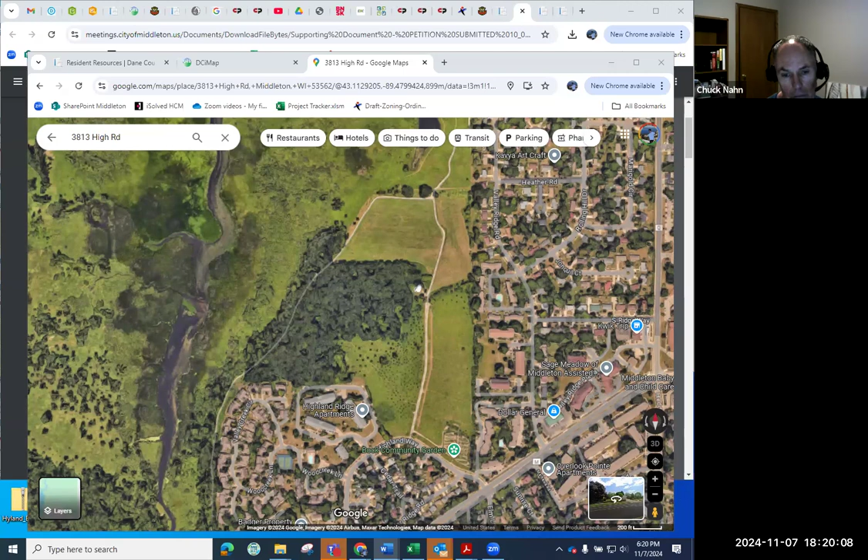And then ADA accessibility—there are ways to assess our ADA accessibility throughout our entire trail system, holistically through the Conservancy. Crushed aggregate is ADA compliant. I know, but it does depend on grade. No, the gravel is not considered ADA accessible—you have to add some type of sealant to seal it. I can provide that standard specification for what crushed limestone is ADA compliant, so I can provide that information if anybody'd like it.

It is ADA compliant if it is at a specified grade. And then also we don't have wheelchairs, I know that was brought up, we don't have those accessible wheelchairs. I can look into that program a little bit further. It was gone before my time. I'm not sure what or why exactly, but I have a few tidbits of information of why they pulled those wheelchairs.

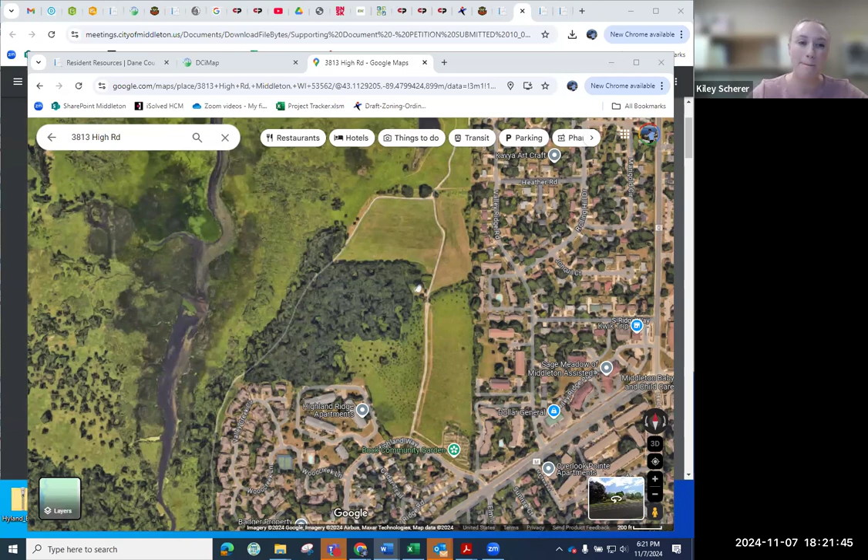I also wanted to bring up that with our entire trail system, I brought this up earlier, we are looking at what deferred maintenance exists, and we have hundreds of thousands of dollars in deferred maintenance on our existing trail system that really needs to be considered when we're adding new trails. It's great to add new and do things above and beyond, but there are trails in very poor and unsafe conditions, and we need to make sure we're allocating funds toward a maintenance program before adding further asphalt throughout the entire city. So that's something I'd like considered when we get a maintenance program built. But that's kind of what I have.

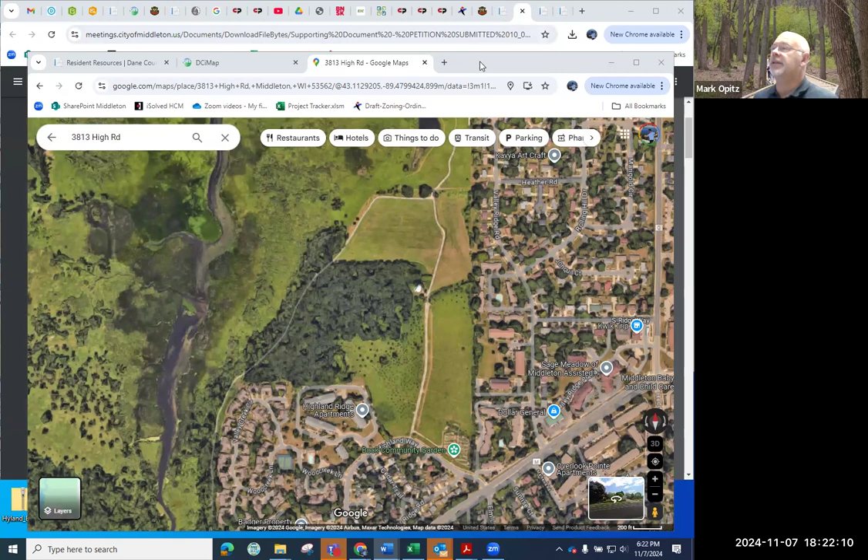Mark, could you refresh me on what we're expecting to do with this tonight? I was asked to bring it to the committee by our city administrator to provide feedback and guidance. It sounds to me like there's some interest in looking at issues holistically. There's a question about ADA accessibility. I guess I defer to you in terms of what other information you'd like to deal with this. Would you like another committee to also weigh in? I don't really have any other advice other than we're looking for feedback from the Ped Bike Transit Committee.

All right, and we have given feedback. Ultimately it's up to the alders, the two alders here, and their colleagues to decide how to proceed with this, obviously. Does anybody else have any remaining feedback then?

All right, trail etiquette. I don't have any packet for that. That was something that Alder Hanairo requested. And I also just want to point out that it's, I think, 6:20. Kirsten, is she already gone? She's already gone. Yep, okay.

This is kind of a nice segue, Lisa, because we were just talking about this. I feel like all these issues on the agenda have been segueing pretty well. Yes, and I asked for this to be on the agenda simply because I get this as a concern expressed by constituents all the time. Bikes speeding past people, and walkers, and as a bike rider myself, I recognize there are a lot of hazardous behaviors on the part of people walking, especially taking up the whole trail or letting their dog go off to the left, and there doesn't seem to be consistency in cyclists signaling far enough ahead. There doesn't seem to be awareness on the part of walkers or runners that they need to pay attention, or even what 'on your left' or 'passing on your left' means. I can't tell you how many times I've said that and the person literally moves to the left. I'm like, okay, maybe I'm getting this wrong.